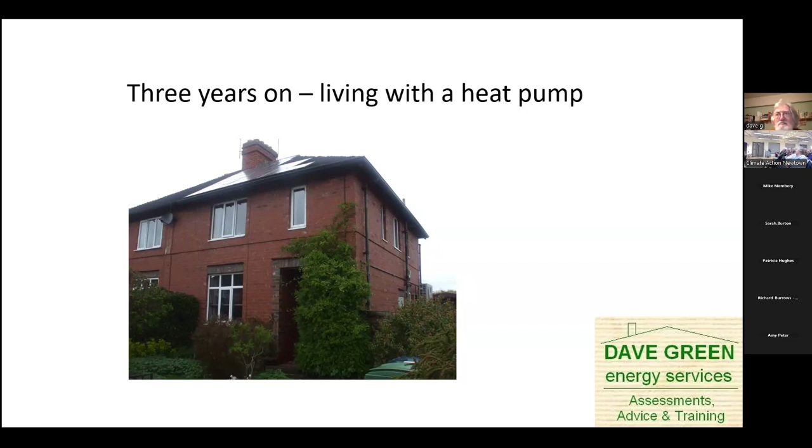There was some side... oh, why is that? Right, has that moved on?

Built in the 1930s, when it was built it would have been absolutely freezing, and carbon emissions maybe 12 tons a year.

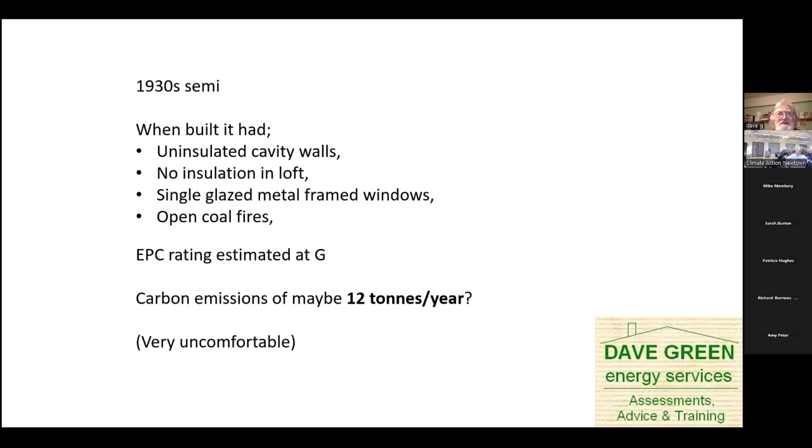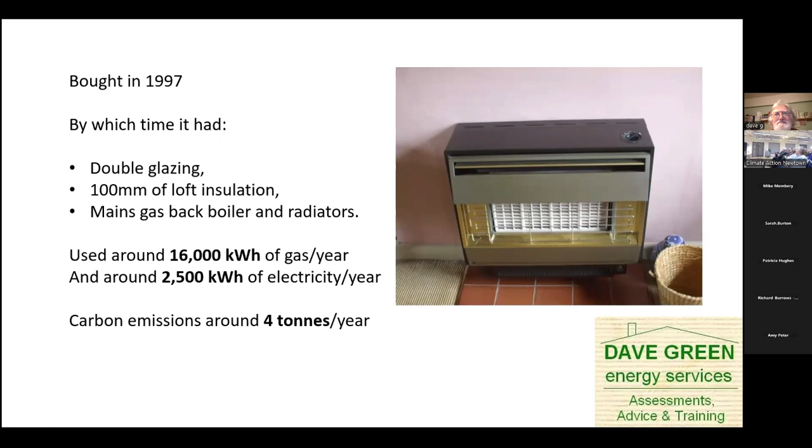Very uncomfortable. I've been here getting on for 30 years now, and I've upgraded it gradually and brought the heat loss down. So I used around 16,000 kilowatt hours of gas the first year I was here.

I fitted a wood stove, did the cavity walls, so I got it round to about 12,000. Then about 10 to 12 years ago I added the PV system and a condensing gas boiler, which got the gas use down to 8,000 kilowatt hours a year and electricity use down to 1,500.

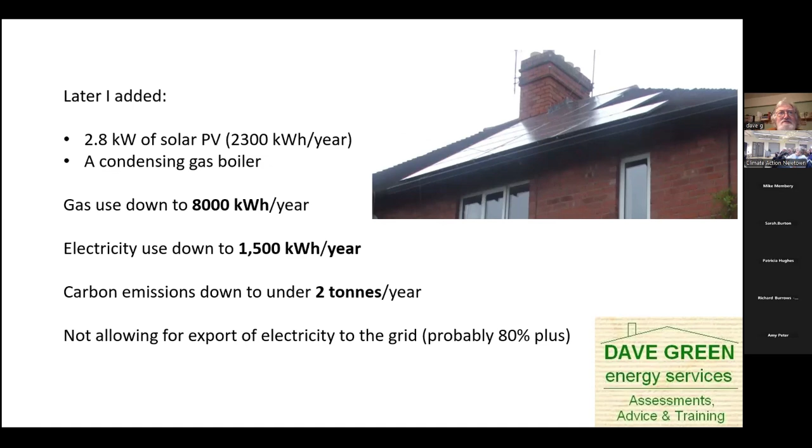So my carbon emissions are down to about 2 tons a year, as against the 12 tons we estimate originally. And that's not allowing for export of electricity to the grid.

But then 3 years ago, maybe 4, I decided to fit an air source heat pump. My gas boiler was only 10 years old but was proving quite difficult to keep maintained. And I thought, well, I'm talking to people about reducing their carbon emissions, I really ought to try one of these air source heat pumps and see what it did.

I found an installer recommended by a friend, MJS of Presteigne. I told them I only wanted it to do the heating. That's no longer possible if you get the boiler upgrade grant - if you go for that, it's got to do the hot water as well. But mine doesn't, mine just does heating.

They calculated I needed a 7 kilowatt heat pump and recommended fitting some larger radiators and a buffer tank. To get the grant, you have to fit a heat pump large enough to heat the house.

One of the problems with properties that are less well insulated is the heat loss calculation will be high. You will need to fit a larger heat pump, even if you only want to use it for background heat. But replacing the radiators is up to you.

So we changed all the single panel radiators in the house to double ones, except in the two rooms we use as bedrooms, which we don't really heat - I left those as they were.

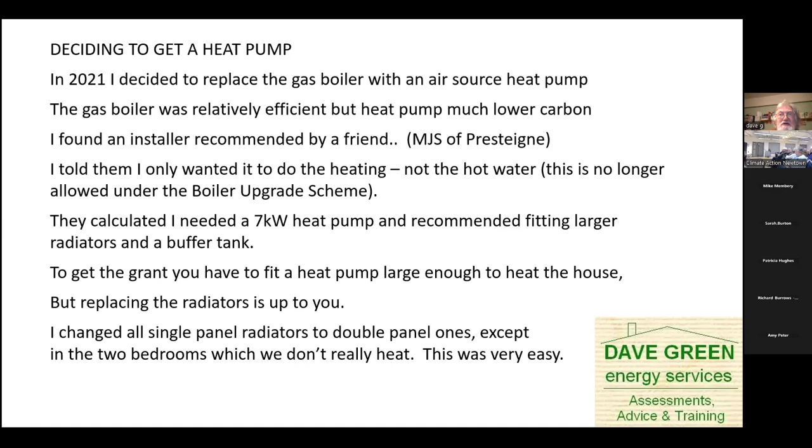So this is the air source heat pump. We didn't consider ground source - as Richard mentioned, it would have been two or three times the price, and we don't have a large garden, so it would have had to be a borehole.

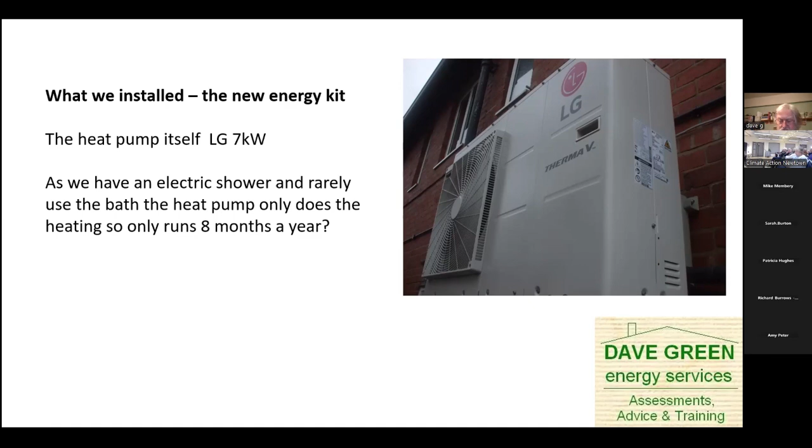So we went the simple route and got an LG Therma. The 7 kilowatt figure is output, so if it's running at a coefficient of performance of 3, as Richard mentioned, you'd be putting about 2.5 kilowatts of electricity in. There is a buffer tank in the bathroom.

This helps reduce some of the strain on the heat pump and gives us a supply of heat for defrosting. But apparently things have moved on in the last 4 years, and buffer tanks are quite rare these days - most installers do not advise fitting one.

We do have weather compensation control, so the flow temperature - the temperature of the water going around the radiators - goes up and down depending on the outside temperature. That's almost essential, but you also need to set a maximum figure for your flow temperature, and ours is set to 45 degrees.

But if it does get cold and the heating isn't hot enough, I can always go in there and raise that by a few degrees. But the higher the flow temperature, the less efficient the system is going to be.

The one time the weather compensation fails a bit is on really windy days, because it's only taking account of the air temperature. If you've got a really windy day, you get more wind chill, but you also get a higher ventilation rate, so really you need more heat. That's when you might go in there and up it from 45 to 47 or even 50 degrees.

And the hot water is done by this little nifty under sink unit, an electric shower.

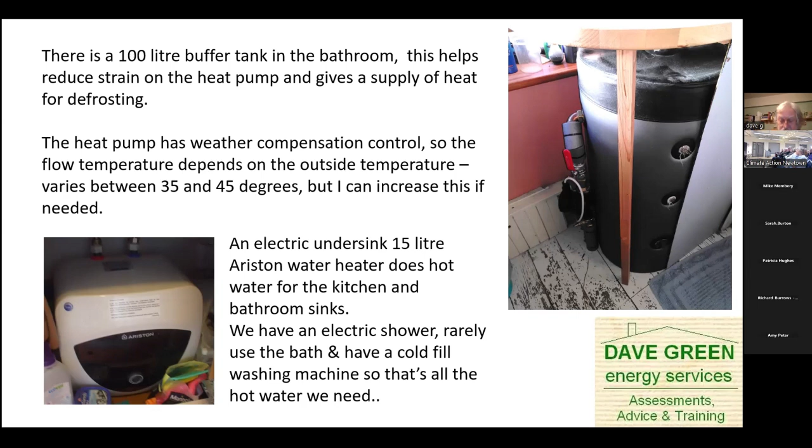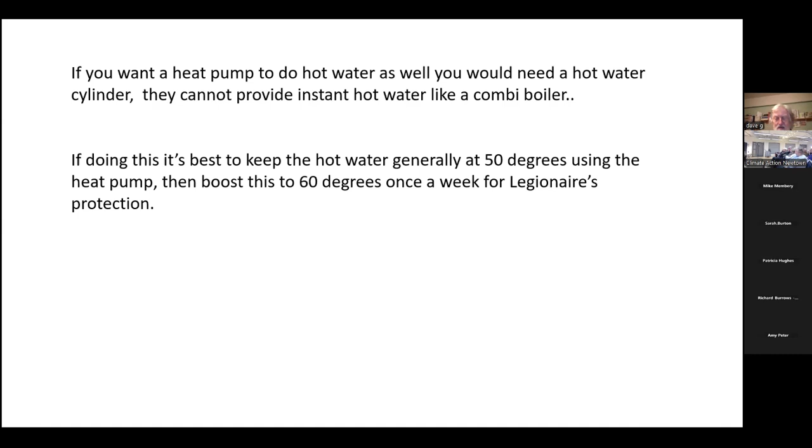If you want the heat pump to do hot water as well, you have to have a hot water cylinder, and that's one reason I didn't want it to do the hot water - I'd taken my cylinder out after fitting a combi boiler back in 2011, and didn't want to put it back in. If you are going to have a hot water tank, the heat pump is best set to keep it at 50 degrees most of the time, with just a boost once a week or so to 60 degrees to check on Legionnaire's disease.

The house is very comfortable. We keep the hallway to 18 degrees during the day, 16 degrees at night. The living room is generally around 2 degrees warmer than this during the day. So the house never gets too cold and the heat pump rarely has to work hard.

We do have a wood stove, but I don't think we've lit it since we fitted the heat pump. It's covered with plants now, so if I wanted to light it, it'd take a few hours to clear the space and get the wood in. Very, very occasionally we might use a fan heater first thing in the morning after getting out the shower, just as the house is warming up after cooling down from the night before.

So the heat pump is providing 99% of our heat requirement.

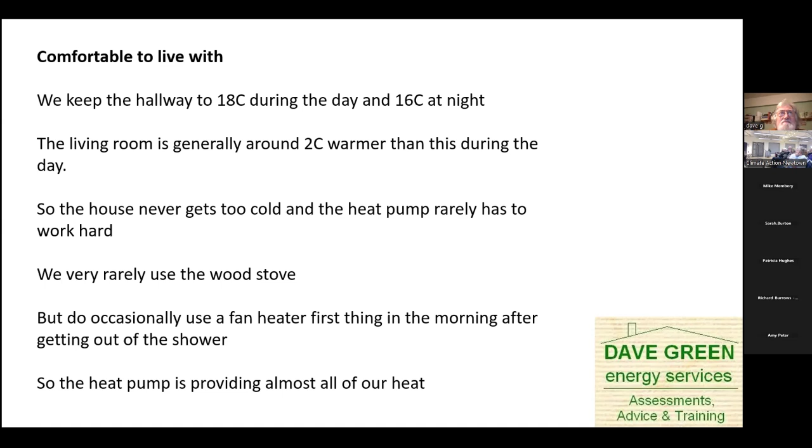Now, what I've done - I haven't got the fancy monitoring that Richard has. Mine doesn't have a heat meter on it. I can monitor how much electricity it uses, but not the heat it puts out.

So I've been taking my readings on a weekly basis, and this was the electricity the heat pump used in its first year. You can see, I presume you can see my cursor, that a lot of the time it's either not in use or ticking over, using very little electricity. There's a few weeks when it's using a medium amount, and then there's 8 weeks in that first year when the usage went a bit higher. Those 8 weeks accounted for nearly 48% of the energy use of the heat pump.

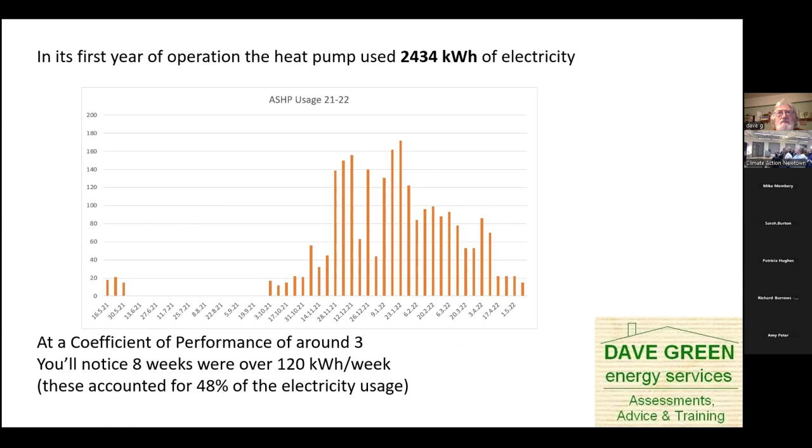I also measure my electricity generation, my PV export and use. Even with the heat pump, I'm still exporting roughly 70% of what I generate. I reckon the PV is providing about 15% of the electricity I need for the heat pump, because the timings aren't really very good. The PV is working hardest in the summer, and even if it is working in the winter, it's not generally working first thing in the morning when the heat pump's working hardest.

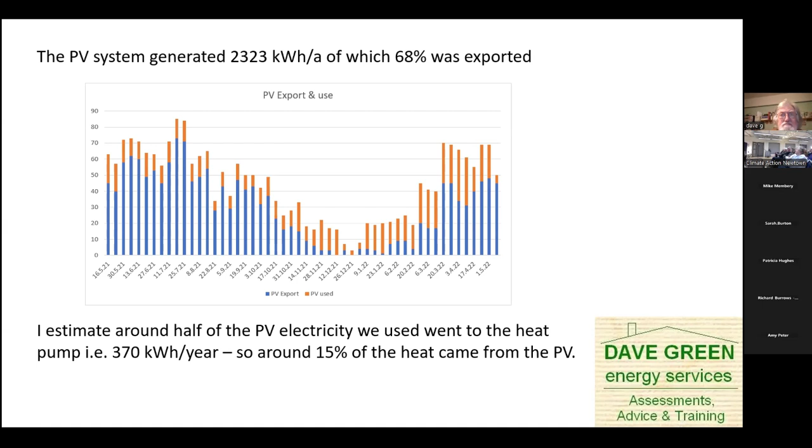The economics - it cost me about 10,000 to fit, including replacing some of the radiators and fitting the buffer tank. I should get about 6,000 back through the RHI, though that's out of date now. The new grant scheme is now 7,500, and that gives it to you up front. So actually, for people with smaller houses, the boiler upgrade scheme is a better deal than the RHI. If you had a very large property, the RHI was better because it was done on your heat demand.

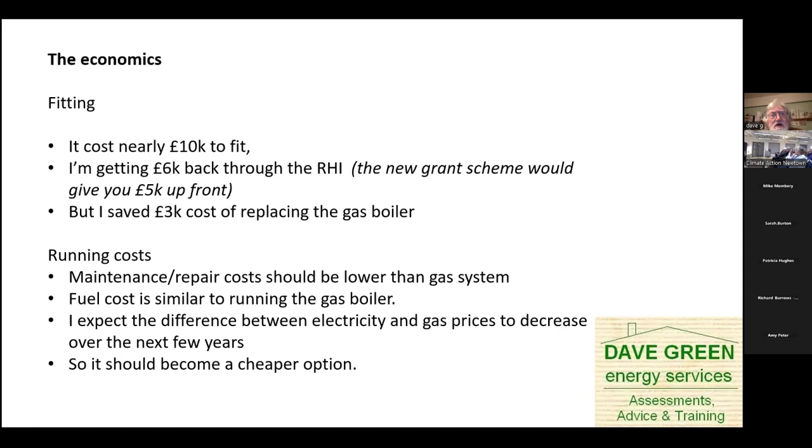So it cost me about 4K maybe, but I saved 3K on the cost of replacing the gas boiler. The running, maintenance and repair costs are a bit lower - I'm paying £200 a year to maintain the heat pump, whereas it was actually costing me 300 a year for my gas boiler with British Gas. Fuel cost I reckon at the moment is similar, but if the price gap between electricity and gas narrows as it's expected, in future years it might be cheaper. So it should become a cheaper option in the future.

But that's not why I did it - I did it to save carbon, really. And I've also plotted the heat pump usage against degree days. I don't know how many of you in the audience like a graph, but anyway, here's a graph.

So the bottom line is the kilowatt hours used by the heat pump in a week, and the vertical column is the degree days in a week. There's a website where you can look up how much heat you should really have needed in a particular week, and then plot that against actual usage.

You can see that the line is pretty good. There are some weeks up here where I'm using a bit more electricity than would be suggested by the curve - the points below the line are showing increased electricity.

There was a period when next door wasn't occupied, and I think these higher weeks were when there was nobody next door. But generally, it's a pretty good line.

It's what's known as a power curve. If the efficiency of the heat pump was the same regardless of outside temperature, that would be a straight line, but this is showing it's a curve. So as it gets colder, for an extra 10 degree days in a week, you need to add significantly more electricity to drive the system, which is what we'd expect.

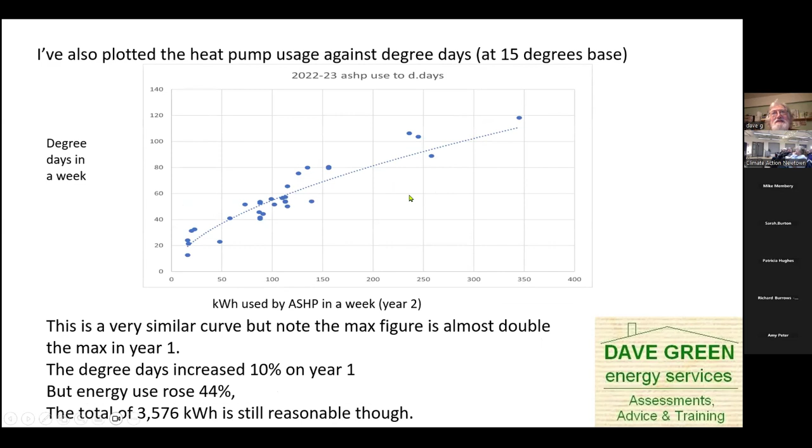I did the same for the second year, and the highest heat use in the first year was under 200 kilowatt hours in a week. In the second year, there were 4 really cold weeks when electricity use did rise, and there was one week when it was an eye-watering 340 kilowatt hours in a week.

The important thing is not to look at that week, but to look at the overall efficiency over the year. So even in that year with those 4 really cold weeks, the system used 3,576 kilowatt hours of electricity, at about 25p a kilowatt hour. So we're looking at about £800 for my heating, which I think in this day and age is very reasonable.

The point where a ground source heat pump would win out is if we got a beast from the east that lasted for 3 months - then a ground source system would definitely start paying its way. But under our normal conditions, an air source heat pump is perfectly acceptable.

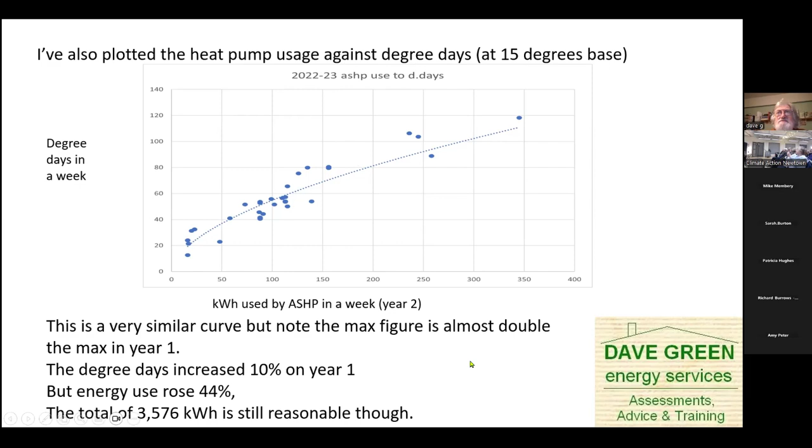It's also undoubtedly improved the indoor air quality. We worry about poisoning from gas boilers, but we merrily cook on a gas stove with no ventilation at all. So I'm sure it's a good way to go.

The heat pump does what we ask of it. There are occasional evenings, particularly when it's windy or when I'm particularly tired, when a larger radiator in the living room would be useful. I do need to take out the old gas fire to reduce ventilation losses in high winds. The heat pump makes very little noise, except in the really coldest weather.

But in the really cold weather, our neighbours aren't outside enjoying a glass of prosecco on the patio, so they seem to be okay with it.

Do be careful where you site the circulation pump - the pump that's sending the water around your radiator system - because it will come on in cold nights to keep the house up to temperature. So if that's in a bedroom, that could be disturbing. I've had people complaining about the noise of heat pumps, and it's not the heat pump itself that's creating the noise; it's the circulation pump from the radiator system.

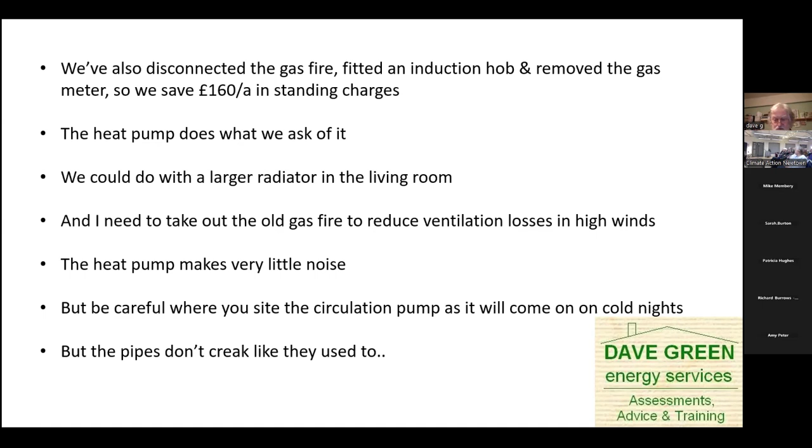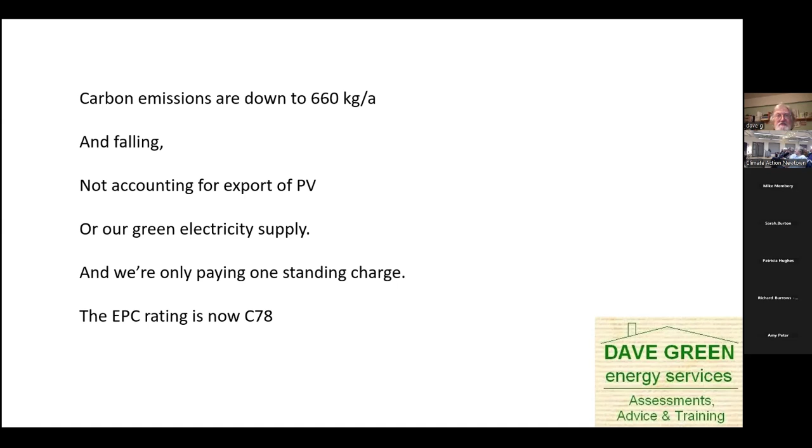Our carbon emissions are down now to 660 kilograms per annum and falling, because of course we're reliant on grid electricity. That's not allowing for our green electricity supply or our export of electricity from the PV system. We're only paying one standing charge, and the EPC rating is C78. So that's our carbon emissions, how they've dropped since I bought the property.

I also want to mention very quickly, I'm working on a thing called the Bishop's Castle Heat and Wind Project. If you're interested, look up the Lightfoot Enterprises website, there's some details on that. We're planning to fit a very large heat pump to heat the leisure centre, the school, and around 100 houses, and we're going to fit a 1 megawatt wind turbine and 500 kilowatts of PV to power the heat pumps. The planning application for the wind turbine was submitted today.